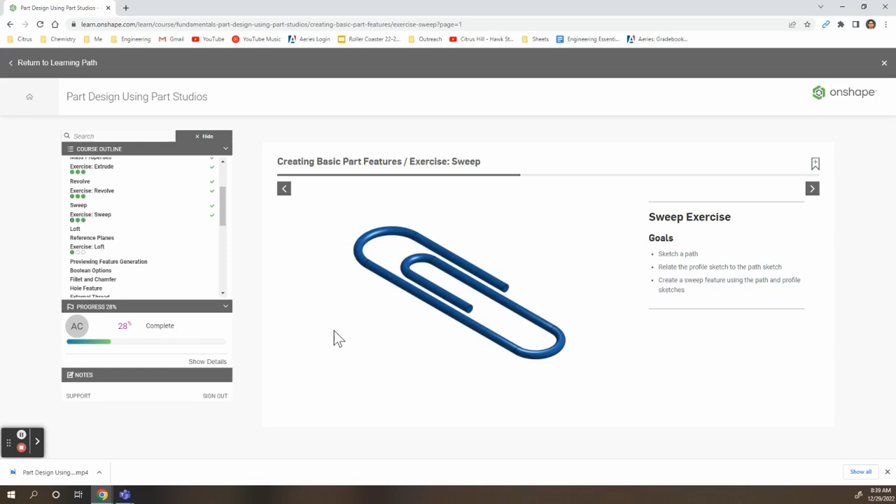Hey, welcome back. So for this video, we are going to be creating this paperclip. This is what the final product would look like. So let's go ahead and get started.

For step one, we want to change our workspace units. We want to use millimeters, and then we also want to work on the top plane. Keep in mind, since we're making a small object, aside from changing our unit to millimeters, we're also changing our mass unit to grams. So we're going from kilograms to grams. This will be important for the self-check.

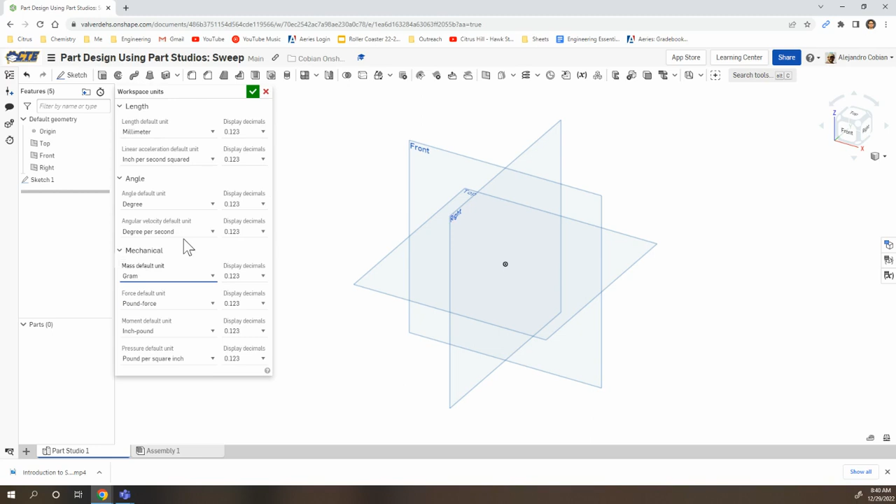For step two, we're creating a drawing for the paperclip itself. Don't worry about measurements or alignment. Just go ahead and create this object right here. It's 3 arcs and 1, 2, 3, 4 lines. By the way, we are making this on the top plane. Let's go ahead and create the sketch on the top plane.

Reorient. Let's create our first line connected to the origin. We go to the left, make sure it's horizontal. Now we add an arc. You can either use a 3-point arc or tangent arc. It doesn't really matter. I'll go with tangent arc or 3-point arc. Go to the side. Don't worry about the dimensions or the shapes right now. We will be making this better in a moment.

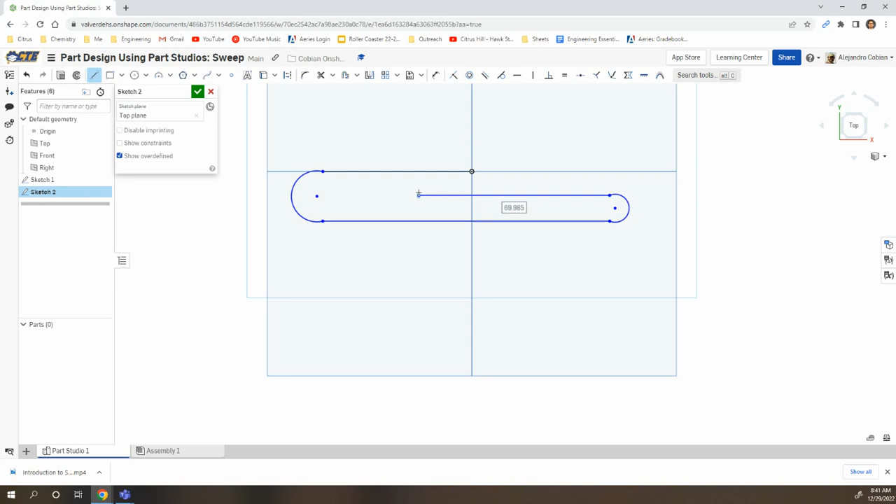We go to the right. We add our next arc. Our next line. I'm going to zoom in for the final arc. And my final line. All right, it looks a little wonky, but it works.

Now for step three, we're adding these relationships here. So we're going to make this point vertical to the origin. So I'm going to click this endpoint, select my origin, and vertical. This point, the center of my arc, and the center of my final arc. And here I click horizontal.

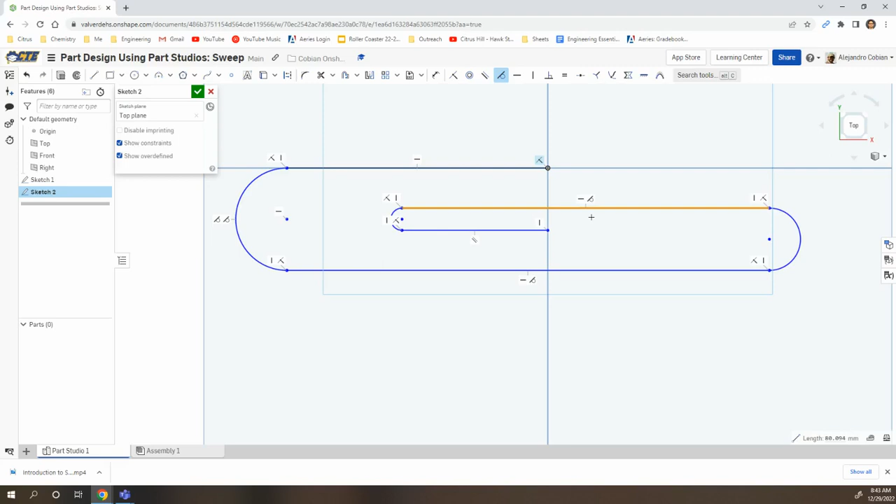And then I make my arcs tangent to the lines that they're connected to. So now I click the letter T or tangent. Click here, click there. Notice we're smoothing out the curvature of the arcs. Let's make sure we show our constraints. We see our little tangent emblem pop up. That means that our arc is tangent to the line.

And then our final piece. All right, so we have tangent, tangent, another tangent, tangent, and tangent, but this piece did not become tangent, so I'm going to click one more time here. There we go.

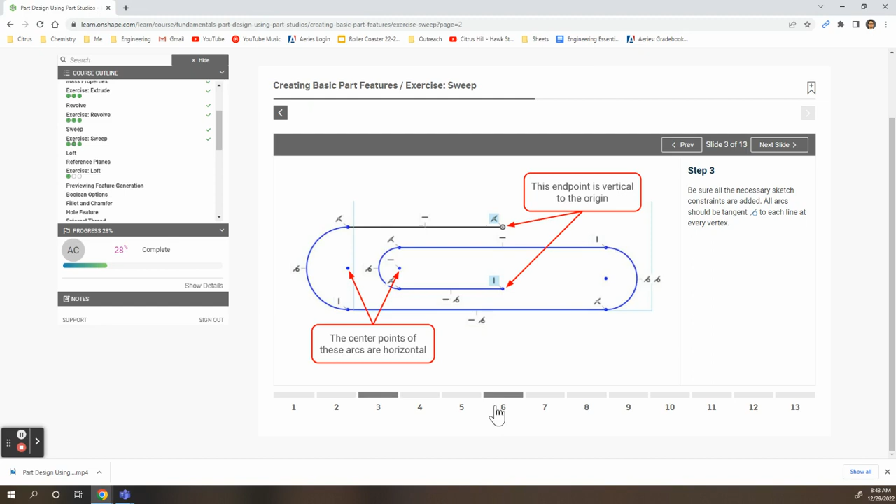Now for step four, we're adding 1, 2, 3, 4, 5 dimensions. And we get rid of the constraints. Letter D for dimensions. This line here has a value of 75. This has a value of 20. This has a value of 15.

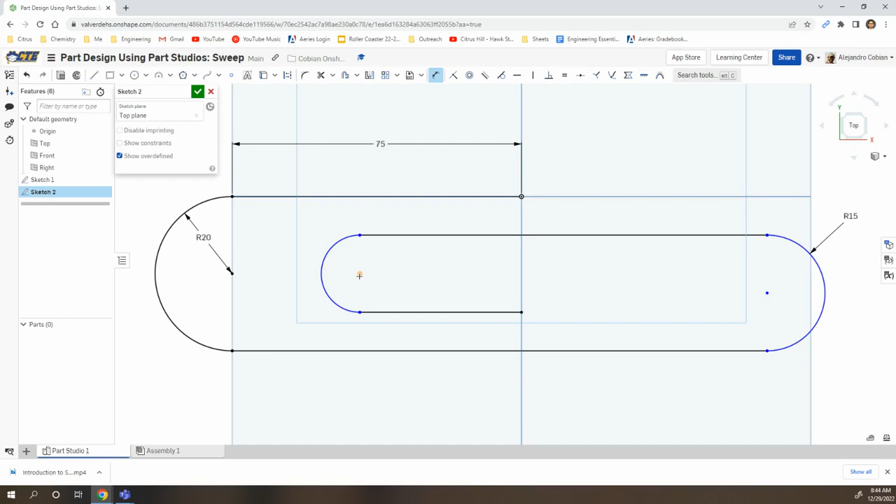The distance from this center to this center will have a value of 25. The distance from the center of this arc to our other arc will have a value of 125. And there's our paperclip drawing.

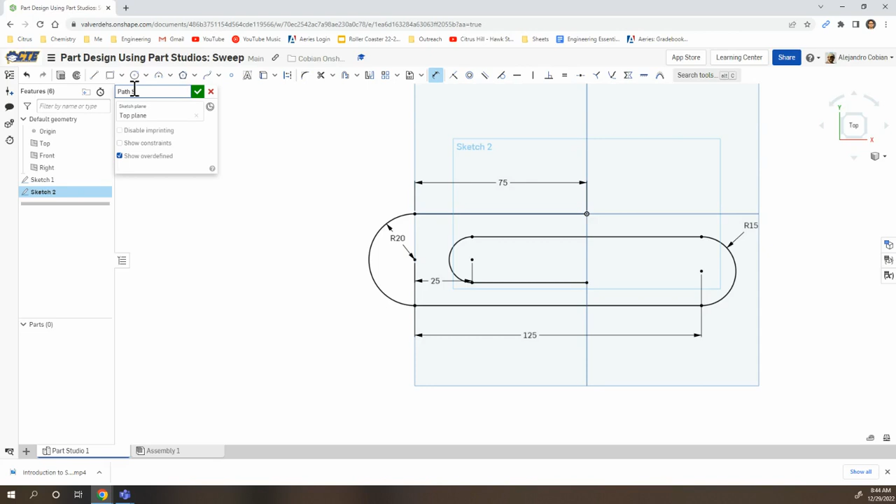Now we're going to rename our drawing to Path Sketch. Click this pencil mark right here. And this is Path Sketch. Hit the check mark. I created 2 drawings, so I'm going to get rid of my first one. Now we're going to create another drawing on the right plane.

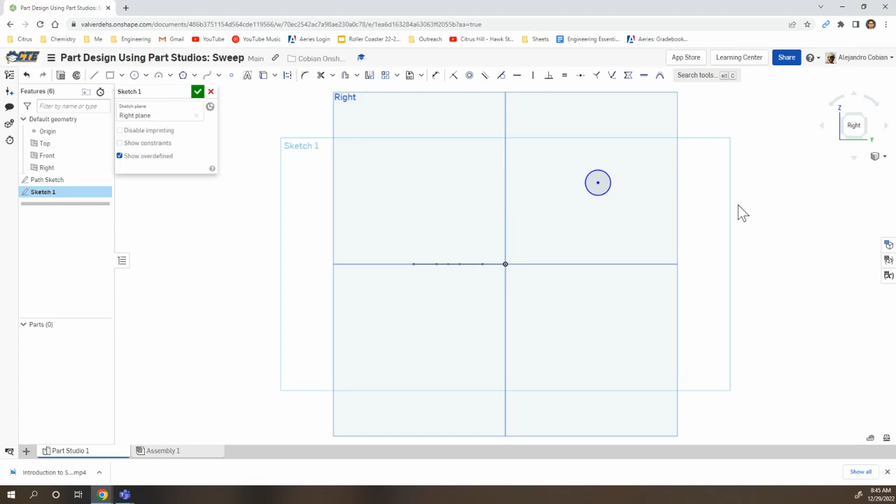Let's get out of this view. So now I click Sketch. I select my right plane. I'm going to go to my right plane. And now I'm creating this circle. The position of this circle does not matter. We will reposition it later. So I'm going to place it here. And we want a dimension of 5 millimeters. So our circle has a diameter of 5 millimeters.

For step 8, we're adding a relationship for our circle and connecting it to our path sketch. So I'm switching the view, zooming in. So now let's click on coincident, the center of your circle, and then the origin. Let's show constraints. So notice this blue coincident mark right here. This is showing that our circle is connected to another object that is on a different sketch.

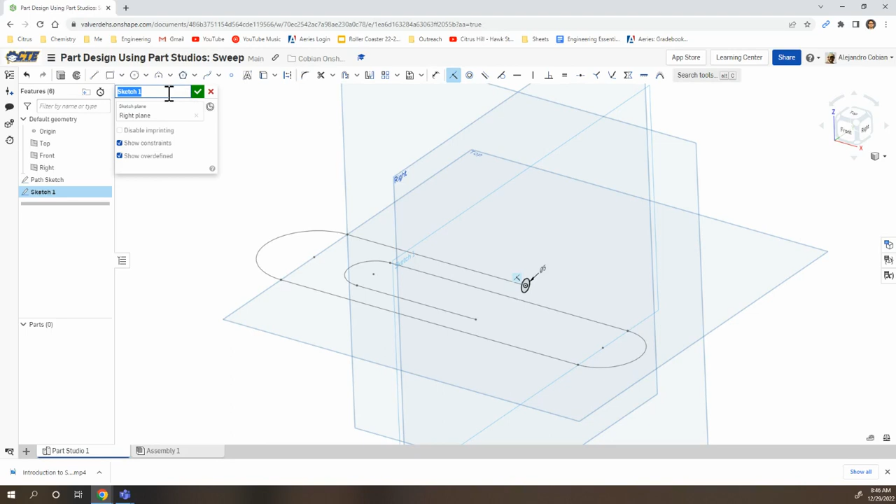Step 9, we're just switching the name. So we're going to write out profile sketch. Click on the pencil. Write out profile sketch. And the check mark. For step 10, we're using the sweep feature, and notice the settings that we're using. We're on solid, new, and how we're selecting our sketches.

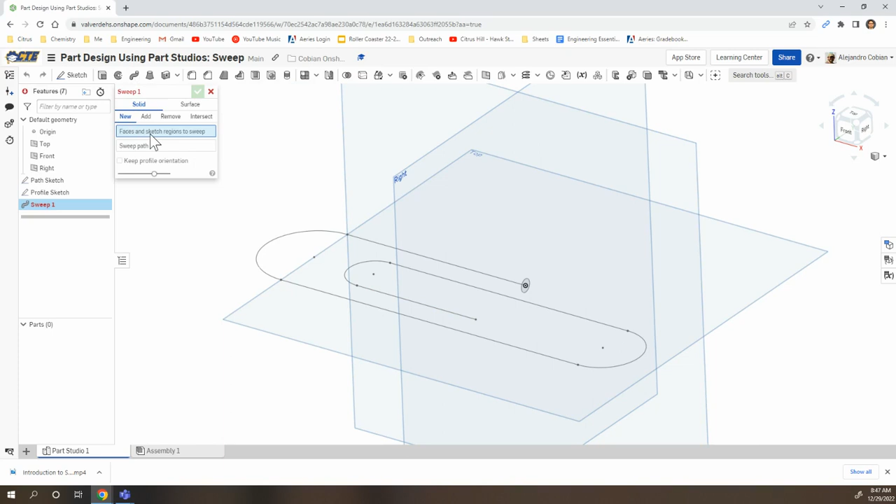All right, so now sweep, solid, new, faces and sketch regions to sweep, so that's a profile sketch. Sweep path, that is my path sketch. And notice we have a rendering of what we will create. And just go ahead and hit that check mark. Now we're renaming part 1 to read paperclip.

Step 12, we're selecting a new material. This is aluminum 1060. So right click paperclip, click assign material, and just write out 1060. Aluminum will pop up. And go ahead and hit that check mark.

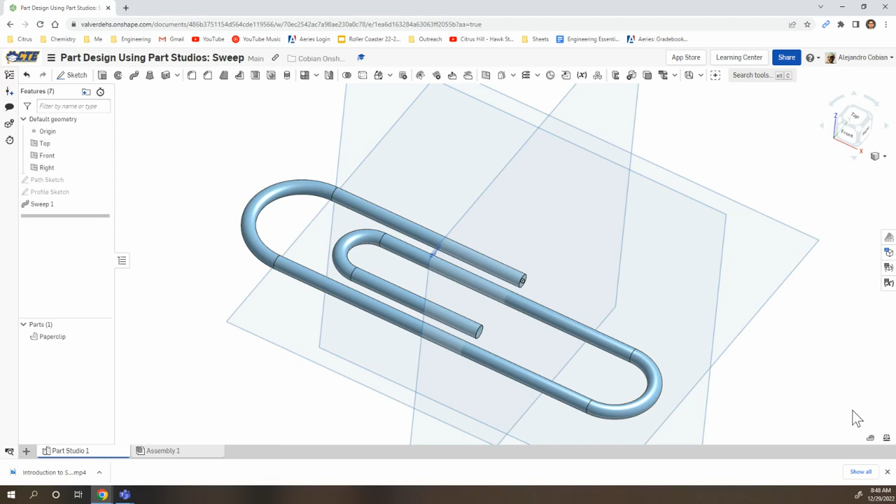Now we're on our final step. We're going to go to mass properties. We're selecting paperclip, and we should have a mass here in grams, and that mass will be used for the self-check.